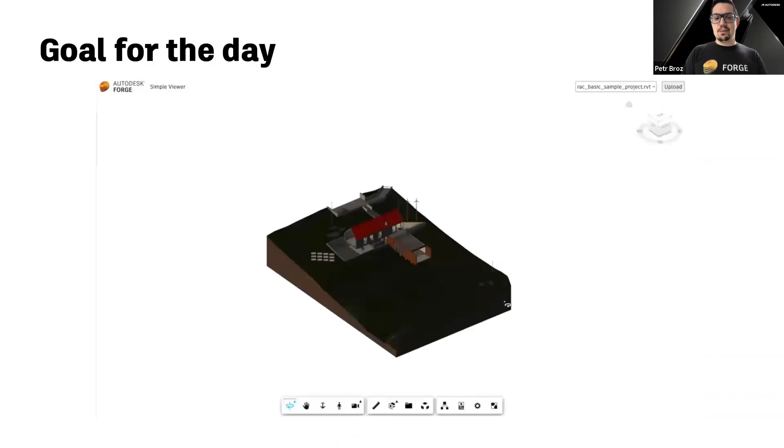Again, allowing you to upload, translate, and preview your designs, whether it's 3D designs or 2D drawings, whether it's AutoCAD drawings or Inventor or Revit or whichever 3ds Max design. Forge today can process over 60 different design formats, not just Autodesk internal ones, but also our competitors. So if you have SolidWorks files or Bentley MicroStation DGN files, all these can be processed with Forge, and all these you would be able to preview using this application that we're going to build today.

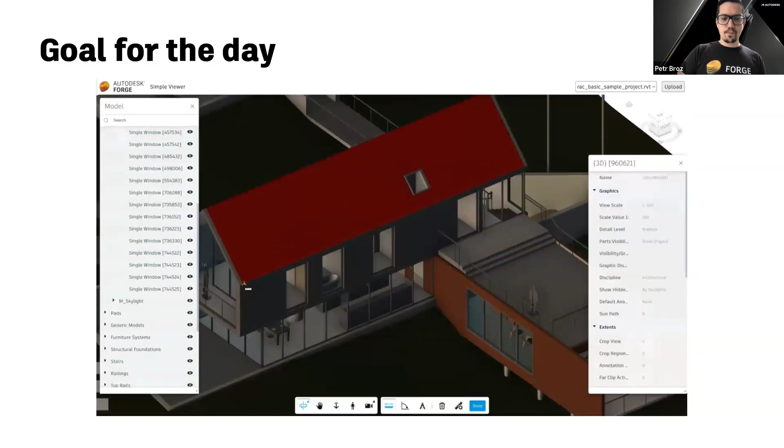Today's agenda is going to be 4 sessions followed by 30-minute breaks. In the first session, we're going to take a look at an introduction into the event itself, as we just did, and setting up the development environment, making sure we have everything ready for session 2, where we actually start coding.

There are a couple of steps, a couple of things we want to double check before we actually start coding, just to make sure that we're all on the same page, working with the same version of Node.js, and that you all have some Forge application credentials prepared, because this is something you're going to need going forward. That's going to be session 1.

Session 2, we're going to start with a simple web server, and we're going to implement some basic authentication logic, which is typically one of the first steps you want to do. Because when working with Forge or any kind of web service or platform, you need some form of authentication. You'll need to set up your application so that it can authenticate itself to Forge before we can really start communicating with the different services, uploading files, translating files, or viewing files. That's going to be the task of session 2.

In session 3, we're going to start implementing the data management features of our application. So again, being able to upload files, translate them, and maybe list files that we have available in Forge, some list that we will want to present to our application's users.

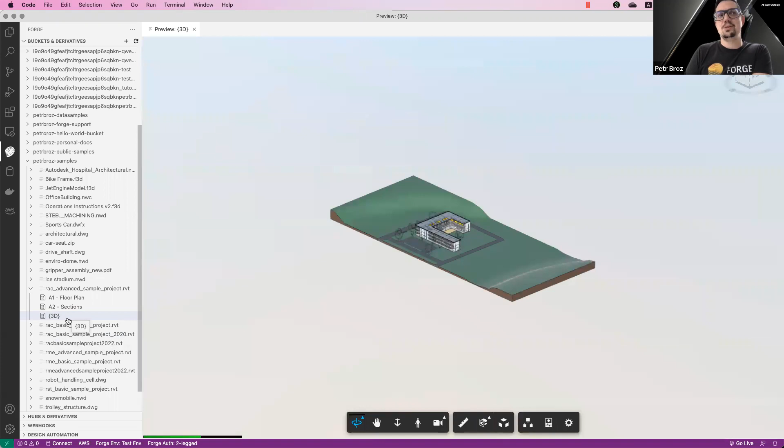All these will be extracted as separate outputs. In this case, you can see I have two drawings and one 3D view from that Revit design. I can right-click these and select preview derivative, and that will open Forge Viewer right inside Visual Studio Code, because VS Code itself is built using web technologies, so it's easy to bring other HTML web technologies into it, into the VS Code extensions.

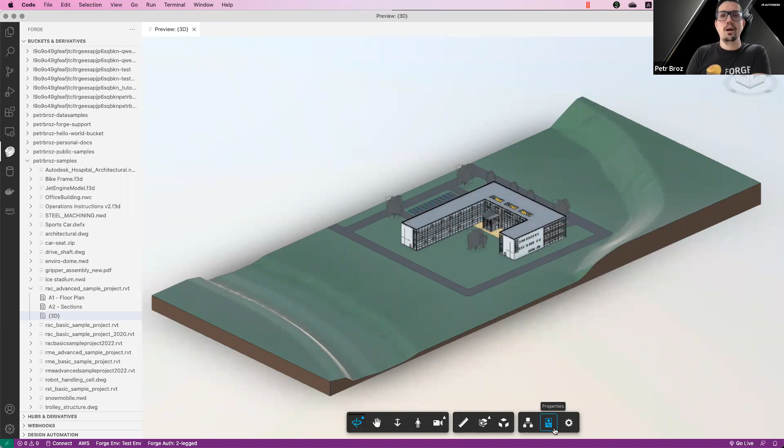So here, we're able to instantiate Forge Viewer and open the design right here without writing a single line of code. The toolbar at the bottom comes bundled with Forge Viewer itself. These are some standard tools you can use to do things like explode, which is probably more helpful for manufacturing models. But you can also do sectioning and take measurements.

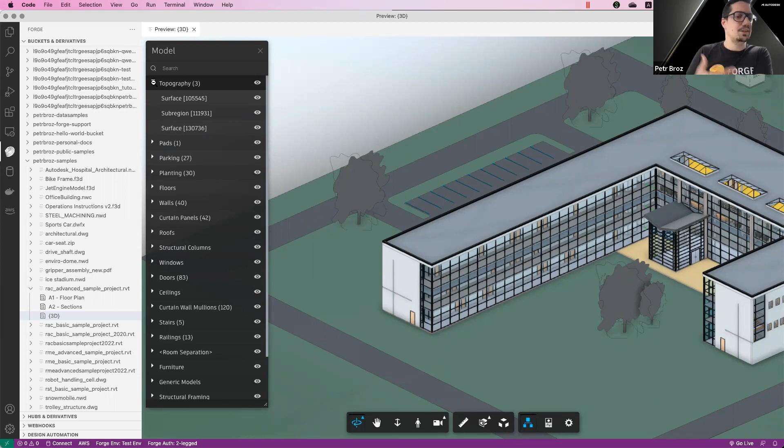You can start exploring the other types of data that Forge was able to extract from your design. In the case of Revit, the hierarchy typically used is families, family types, and instances. That's the logical hierarchy we see in this model browser panel available in Forge Viewer by default, where I can check, let's say, all windows of different types, and then look at the individual instances and hide everything else.

Let me try something else, maybe walls. So there's a curtain wall, a basic wall. Again, you can quite nicely and easily navigate around the model with all this metadata. So it's not just the visuals, it's all the metadata that Forge extracts from your design files as well.

So you get the hierarchy, and also, let's say if I select this wall, I also get a lot of information about that specific design element. The amount and type of properties you see will differ based on the input file format, but Forge always tries to extract as much information from the input files as possible. In this case of Revit, if I select the wall, you can see information about the different constraints, structural information, dimensions, all sorts of things that might be helpful for you in the future.

Because it's not just about being able to view these properties here in some panel in your web application, you can also query all these properties programmatically using Viewer APIs, as we'll see. That's something we're going to explore on day 3 when we work on the dashboards tutorial, where we're going to be mostly using the Viewer APIs to do all sorts of operations, to query information from the loaded model in the viewer, and to change the look and feel of the viewer itself.

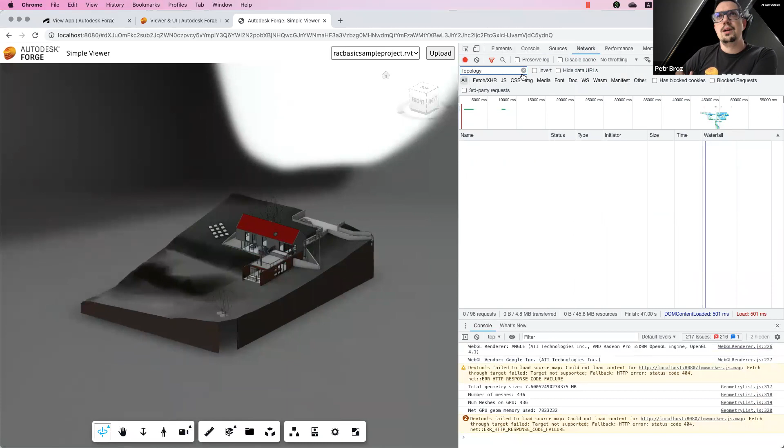And now let's see if our upload is working as well. I'm going to switch to the network tab, which is useful to monitor any kind of requests coming, any kind of communication between your client side and the server side. That's all captured in this network tab. So what I'm going to do is I'm going to hit the upload button.

So now again, if you remember, under the hood what this did is it clicked on a hidden HTML input element to actually trigger this dialog to pop up, allowing us to select a file. So let's say I'm going to go to some of my sample files. Many of these can be found online. I have a bunch of AutoCAD sample drawing files here. So I'm going to grab maybe the architectural. I'm going to say open, and it will initiate the process of uploading the file to the server.

See, so now we're showing a notification saying file has been uploaded, do not reload the page. And now, in our code, if you remember, in client side, when a file upload finishes, we immediately change this hash fragment asking the viewer to load that new file. But a new file hasn't been translated yet. That's why we saw translation in progress.

Now, as you can see, the translation of this DWG file was really fast. So the notification only showed up for a couple of seconds. And now we're already looking at this new architectural DWG file that I just uploaded.

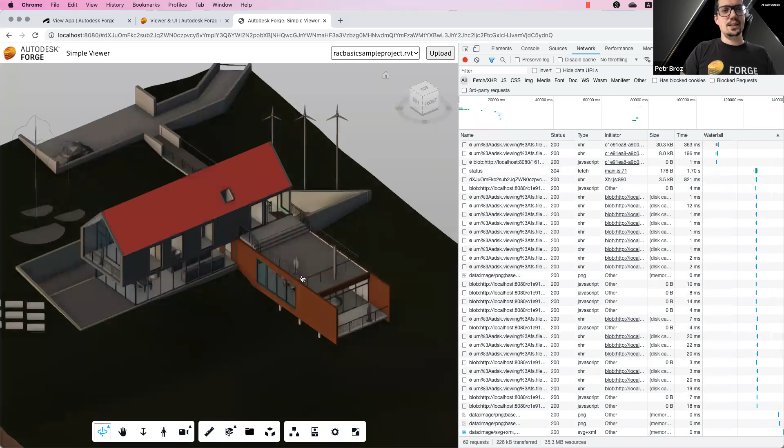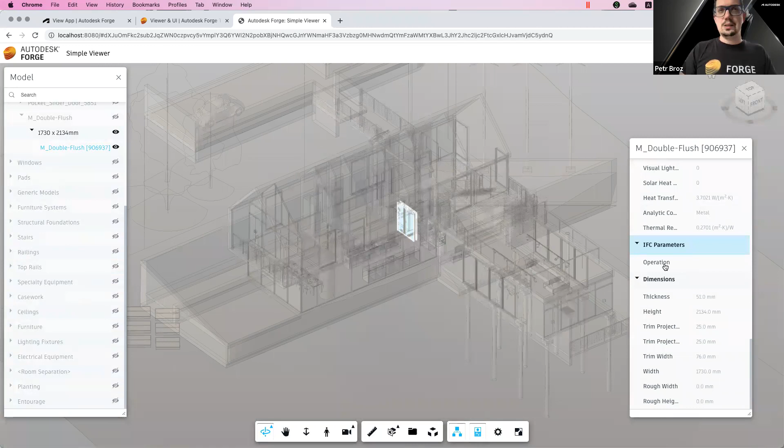And they'll be able to use the standard built-in functionality in the viewer, things like exploring the logical hierarchy of the individual designs, or reading properties that are available on the individual design elements. So that is our simple viewer application. That concludes our tutorial today.